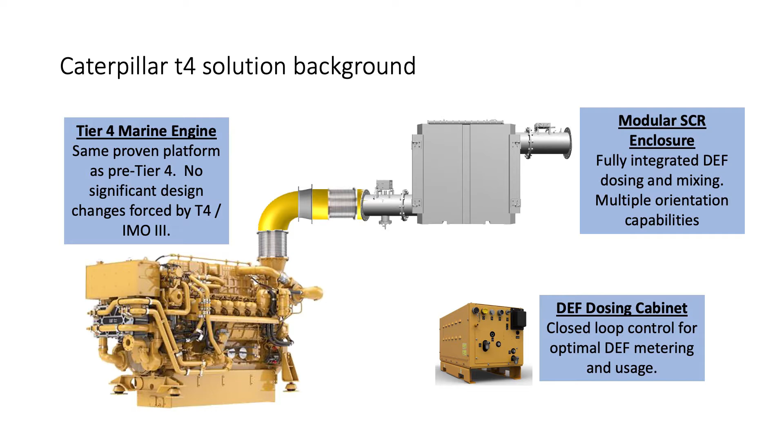The reliability of the engine, its ability to stay operating in any condition where a Tier 4 enabling component might fail or malfunction. The importance of maintaining that power and not having to deal with an engine derate or shutdown. Those have been paramount. And so that's been a very good story so far. I have some updated sales numbers for you that are really encouraging and speak to that, actually.

So with respect to the other enabling technology, we took the engine, we improved it for Tier 4, cleaned up its oil consumption a little bit, improved the injection timing to allow the SCR to do its thing to reduce the NOx. And it's a very clean, very elegant setup, very easily serviceable. And perhaps arguably the biggest enabler here is what you see in the bottom of the screen, this DEF dosing cabinet.

And it's important because when it comes to SCR systems, there's a myriad of different approaches that one can take. One of those is open loop dosing, which in past experience has often led to problems with SCR. We've addressed that with a closed loop system that actively monitors NOx into the SCR and NOx out of the SCR. So we're optimizing the amount of DEF dosed into the SCR at all times. And so that's been very successful.

We have a growing experience with it, a growing comfort level in the industry with it, and it's turning into a very good story here with now being comfortably several years into Tier 4. So just some numbers that help speak to this. Hopefully the colors work for you. I call it SCR technology by the numbers. So 316, what is that? Since 2015, this is the number of engines and after-treatment systems that we've delivered into commerce. And from our view, that is a very good story, and that number appears to be accelerating.

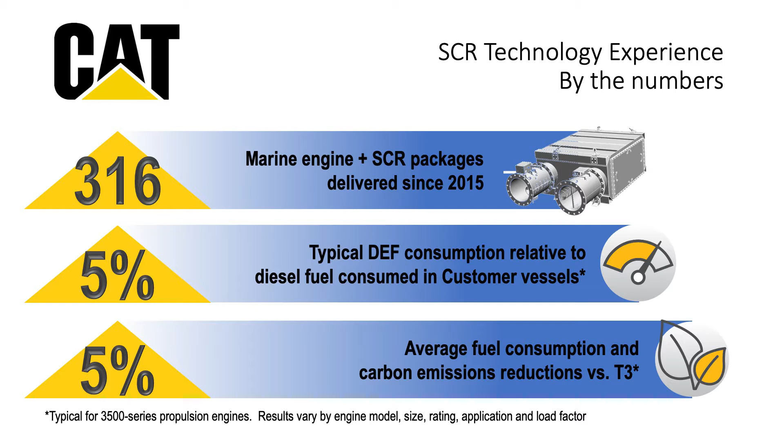5% in the middle row. That's been the general experience so far. We've predicted it from development days back in pre-2015, pre-Tier 4 days. We estimated that in general, the engines will more or less consume about 5% of the consumed diesel ratio in DEF. And we have customer references that are underscoring this and supporting this.

So the confidence of being able to predict and help you plan your DEF consumption rates has directly benefited our conversations. It helps us work with you in planning the onboard storage, how quickly you need to replenish, and helps us understand the operating profile of your vessels. And so we've become a better company just by helping you watch those parameters.

5% on the bottom row. In general, this is a very general number because it does vary. There's some fine print there, but 5% general improvement in fuel consumption. And that number does vary with model, with engine rating and with application. It can be anywhere from 3 to 9%. But what we can confidently say is we have seen notable improvements in fuel consumption from pre-Tier 4 to Tier 4.

And although that benefits you, the vessel owner, directly, economically, now with the increased focus on environmental and social governance, you might be getting investor pressure for how well you're advocating for the environment and what you're doing to improve your environmental credentials. The saved fuel consumption from Tier 3 is also directly proportional to a CO2 reduction. So again, every engine that we deliver, we feel that we're helping clean the air, helping you with your environmental credentials, and helping you elevate your environmental responsibility for your customer base.

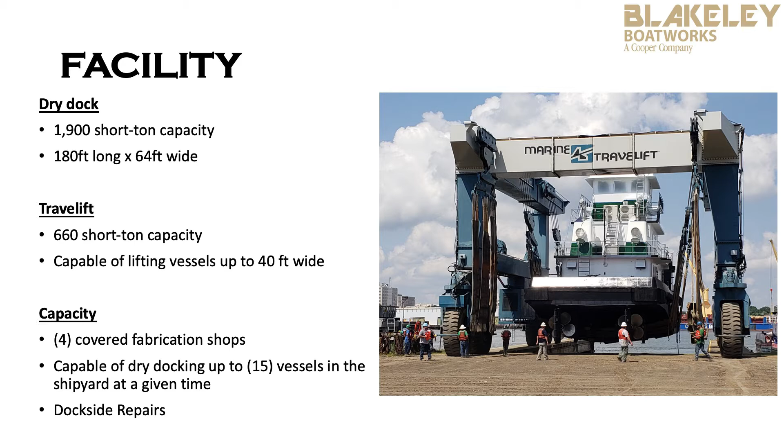At our facility, we've got a 1,900-ton dry dock and a 660-ton travel lift. We have the capabilities to work on up to 15 vessels at any given time. We also have 4 fabrication shops fully undercover that we can work vessels in. Our goal as a shipyard is trying to provide a full service for our customers. We want to be a one-stop shop to everyone that comes into our facility. We've found out that customers and projects go a lot smoother if we've got a lot of these facilities in-house itself. So we're not contracting outside vendors to do as many of those items.

So within our facility itself, we do have full steel structural ABS welders. We've got a full pipe department. We do all our in-house blasting and painting. We have carpenters in-house that build for new construction and repair, machinists. We've got our engineers in-house, a warehouse that takes care of all supplies and shipping. We also have engine technicians who are capable of working on Caterpillar, John Deere, Cummins, and so forth. Our own electrical department handles all new construction and repair projects as well.

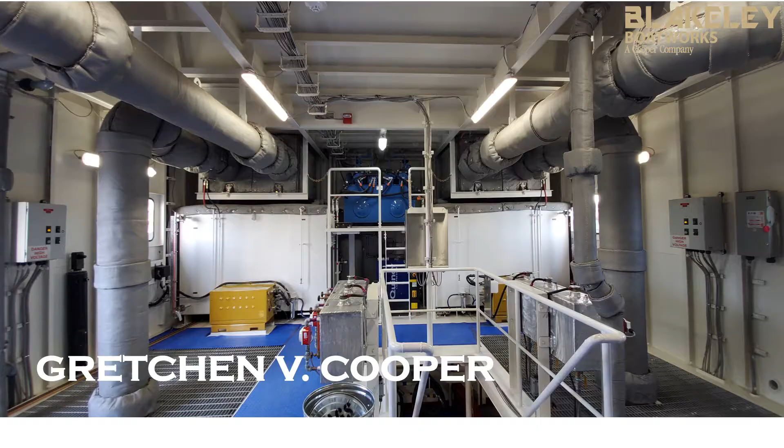We're also, as Jim alluded to earlier, the first yard in the nation to successfully construct the inland push boat with high-speed Tier 4 engines. So that's something that we're glad to be associated with from a yard's perspective. Sliding on to the next slide, we have the Gretchen V. Cooper. This is a Tier 4 vessel that we constructed.

When this project first started, as a yard, we were very excited about this challenge. Our team worked very closely with our local dealer, Thompson Cat, and our naval architects to come up with a plan of how to best implement and install the system in our vessel. We had two main priorities. The first is the ease of installation, and the second is the ease of maintenance down the line.

We wanted to find a way to get all this equipment in a centralized location so it would help, from a shipyard point of view, to be more efficient with the installation of the piping. Our solution: we increased the height of the upper engine room so we could actually fit the urea tanks and the CEM above it. We raised it by close to 20 inches from what the normal design is.

So as you can see in the slide, we have two urea tanks on the port and starboard side. Right above that, we have the CEMs located. The urea tanks were sized for about 10% of the fuel capacity. In between the urea tanks, we put our transfer skid. In front of the urea tanks, we put the dosing cabinets. So essentially, having all the equipment so close to each other actually made the piping go very, very smoothly. It was a fairly efficient and simple process from the yard side.

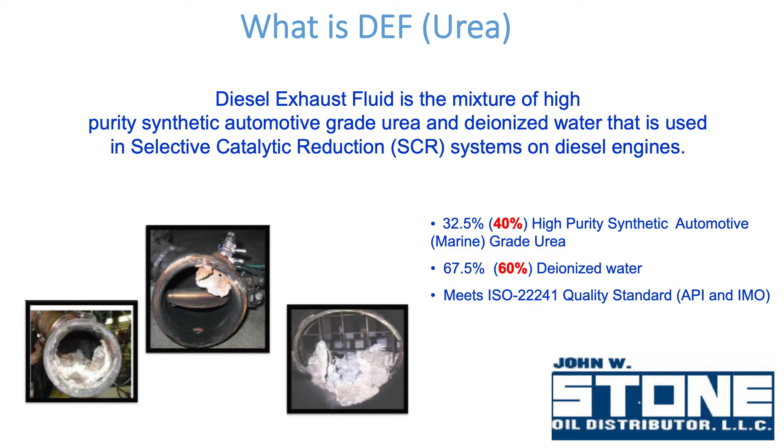Currently, Stone covers Baton Rouge, south on the Mississippi River, and with a recent acquisition, we're now in Channelview and Galveston. And we also have a blend plant that is blending the urea. We've chosen, from a marketing standpoint, to stick by 40%. Whether it's right, wrong, or indifferent, happy to have a conversation with everyone. Our thought process is, why push around water? A hair difference in price, but a denser product.

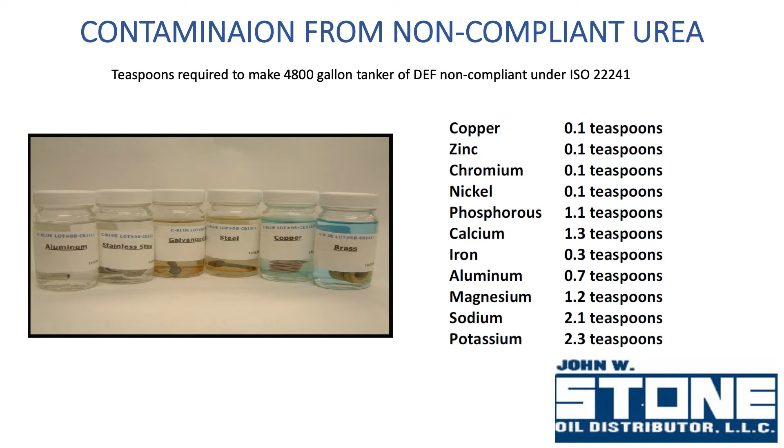And I think Caterpillar and some of the other engine manufacturers have got smart enough technology that can sense the solution in your tanks and dose it accordingly. There are some issues with some folks that are going out. You can't just buy farm-based urea, blend it with general water, and out the door you go with a DEF or urea solution. These are some of the compounds and what it takes for a 4,800 gallon bobtail to be contaminated. You're talking about 1/10 of a teaspoon. So the purity of your feedstock is really critical.

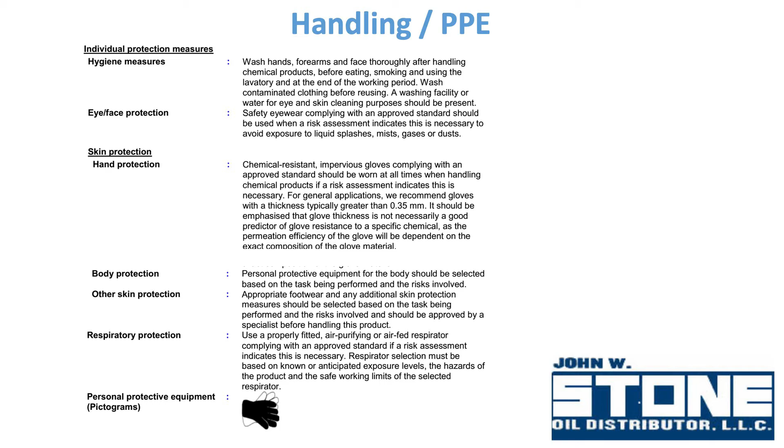You can see on y'all's left-hand side the contamination that can be due to impurities. Let's talk about handling. There's been some talk in the industry. Stone has been doing this since 2011. The first SCRs that CAT put out to icebreakers, the Aiviq that went up to work for Shell in Alaska, those had monstrosities of SCRs. They were first generation, but we started delivering back then, and handling was not a problem.

Generally speaking, the same PPE our truck drivers and tankermen would use to deliver diesel is the same PPE they should use when delivering DEF. It's not dangerous. I can go into very gross detail on what it is, happy to do it one-on-one, but it's essentially urea. So read between the lines. If you feel you need goggles, a face mask, rubber gloves for diesel, that's what you should be using for urea as well. It's not something to be scared of. It's basically fertilizer.

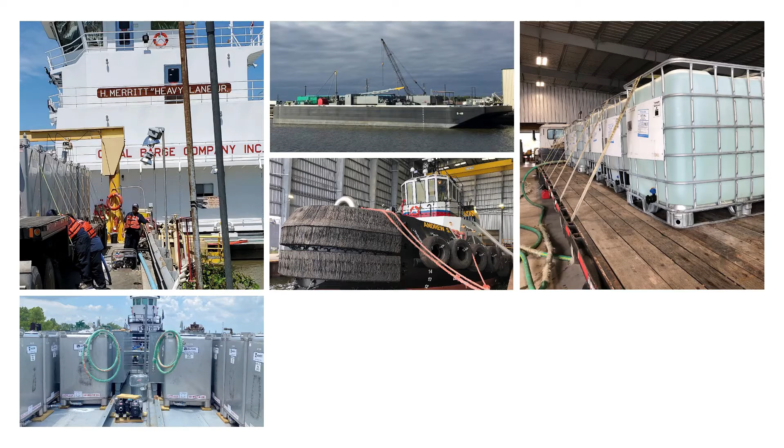Again, we've done this back to 2011. This is a little bit of a dated slide, but we did some initial fills on the BISO boats around the river recently. We can do bulk deliveries. The upper middle photo is one of our dedicated barges with a bulk 8,800 gallon tank of urea on board, and then the barge in Baton Rouge is built with tote tanks, picking up a couple of BISO boats. It's been around, folks. I don't want y'all to be scared of it. It's the technology that's coming. There are horsepower ranges that can't meet this Tier 4 requirement, and there's nothing else out there other than the SCR. That's all I've got.

I encourage you all to ask some questions. I wanted to fly through this and give you an overview. There are some very intelligent and knowledgeable panelists up here, and in the crowd I see some folks with experience, so I encourage you to ask questions. At that, I'm going to turn it over to David with Economy Boat.

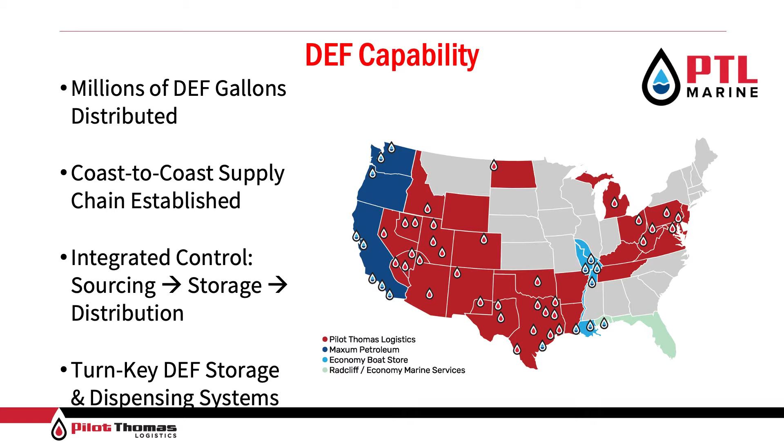We service the inland waterways, of course, the Gulf Coast, and also the U.S. West Coast, so truly coast-to-coast distribution. We've got an integrated supply chain all the way up to direct contacts with the manufacturers. The Pilot brand is the same as Pilot Flying J, the truck stop and travel center business, who's actually one of the largest manufacturers of DEF across the country, where it did come into the trucking industry at a much more rapid and accelerated pace. So we're very comfortable with the solution, very comfortable with the distribution of it, and making it readily available. So the capability is very much there in place.

From an availability standpoint, kind of highlighting on the inland waterways, as that's really what we're here to talk about. We've got access to both the 32.5% and 40% urea solution. We've got that available in drums and totes. Our deliveries up to this point have been done via totes primarily. We've serviced on the inland side some canal vessels, certainly Cooper vessels in the Cooper fleet on the West Coast, Washington State ferries, Kirby offshore, Foss Maritime, et cetera. And so as the demand has increased and continues to increase, certainly the suppliers or the distributors will be able to service you guys when and where you need it.

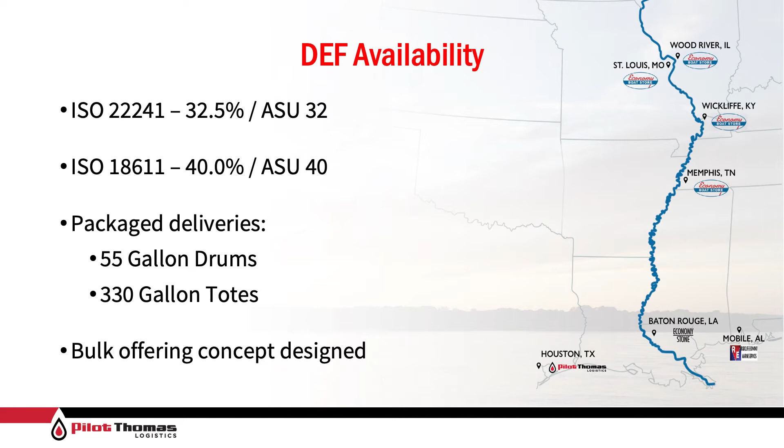From a bulk standpoint, kind of here last year, I think a lot of things sort of went on hold. We've got the concept designed and in place to make that available on our fuel flats or our delivery barges. Not something we've actually put in place at this juncture, kind of waiting a little bit of the chicken and the egg there in terms of when and where we need it. But up to this point, we've been more than capable of supplying our customers via totes primarily as the delivery option.

Quality control, kind of the final component here, as Tony mentioned, very sensitive to chemical impurities. DEF does require specific or dedicated equipment in the forms of tanks, pumps, hoses, etc. It requires stainless or poly tanks. There is an aspect of freezing, certainly that this product is susceptible to. Not really an issue, maybe with the exception of the farther northern parts of the Mississippi River system. You might see that being an issue in St. Louis or Wood River this last year. Maybe you would have seen that in Memphis or even Houston as well. So there are a couple of challenges there, but again, we're more than capable and equipped to manage through that.

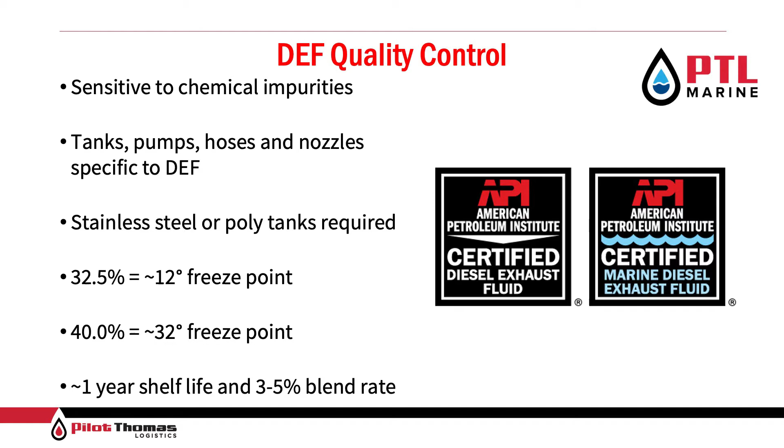We talked about the blend rate earlier, kind of in the 3 to 5% range, and most of the DEF, we've generally found that it's got about a one year shelf life in terms of being readily available. So, lastly, just in closing here, kind of the reliability function. It's there when and where you need it. Certainly with the network of distributors that are out there, not only for PTL Marine, but also the great brands that Tony mentioned as well. You should have confidence, a comfort level that this product is available to serve you and your needs and keep your vessels moving. So that's all I've got.

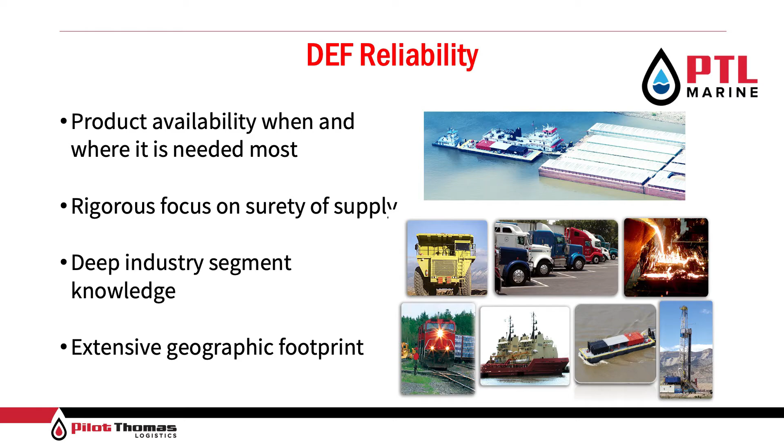Good afternoon. I'm Matt with Cooper Marine and Timberlands, Director of Maintenance, and this Gretchen Cooper is one of the boats that I'm responsible for the maintenance on. Right now, I'm going to start out with some real-time data on the DEF to fuel burn ratio. I think earlier it was mentioned about 5%. This is real numbers from last week.

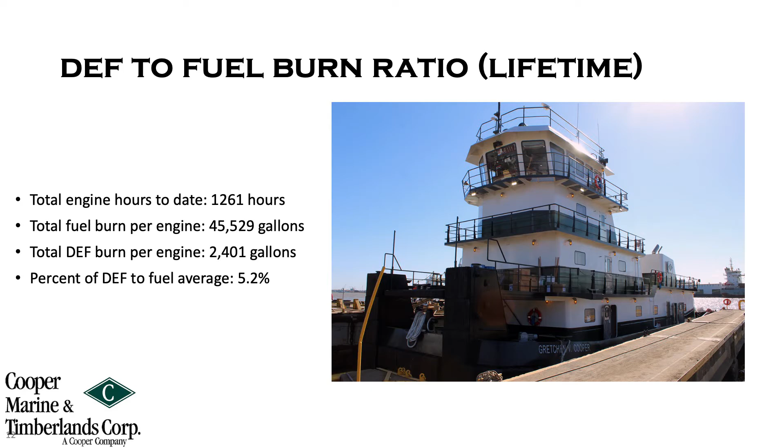One engine, or both engines, I just put one engine's worth on here, but we had about 1,261 run hours, 45,000 gallons of fuel burn, and 2,400 gallons of DEF. Puts us at about 5.2% over the life of the boat right now. So we push 8 barges max up and down the Tenn-Tom.

Our farthest trip has been from Mobile to Cairo, Illinois, and they just returned from that trip. So pushing upriver, obviously it's probably at 80-90% load, and coming down river a whole lot less than that. We were trying to get what our average load factor is, but I haven't been able to nail that down yet. I'm sure as time goes we will learn that.

So the boat has a 42,000 gallon fuel capacity, 4,200 gallon DEF capacity. So that gives us a pretty good pad, so we don't have to worry, if we need fuel up north and we can't get our hands on it, which these guys assure us that we can get it at any time, we're not going to be in trouble.

So that moves me on to the training and maintenance and learning curves here, and brings up Thompson Cat. They had their engineers and their electricians and technicians come in with my crew, one-on-one Q&A, nothing formal. Spent several hours in the engine room, on shore power, going over everything.

One of the crew's most major concerns was what happens if this DEF system quits working? What happens if I run out? Do my engines derate? Do they shut down while I'm going through a bridge? Answer to that is no, they do not.